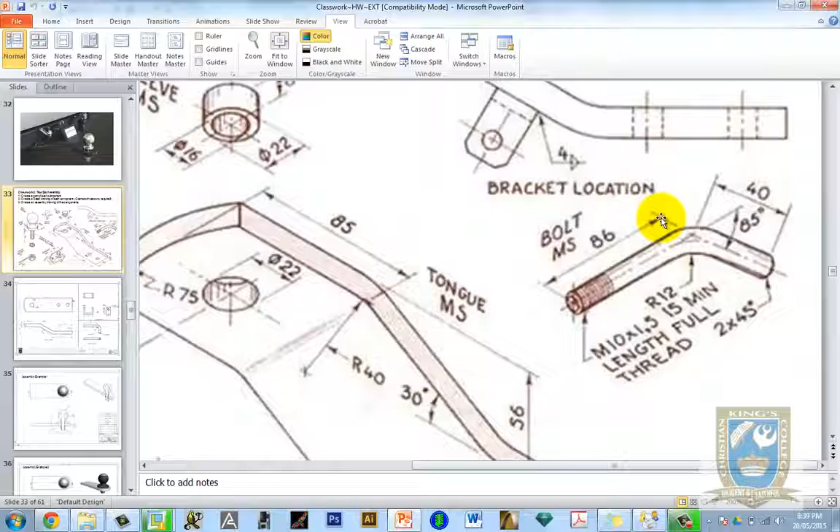The other thing to realize is that we can see that there's an axis line running down the length, and if it was to finish on a sharp corner here, it would be 86 millimeters long. Then from where that axis line meets here, if we were to measure that in a straight line, it would then also come in here at a distance of 40.

We can see that there's a radius of 12 internally inside here, so that this section, this metric 10 circular section here, it can be blended from this end to follow this line, and then blended to fit another section on the other end. So we're going to use the tool called the swept blend, and we're going to start off by drawing the axis for the two sections to blend in between.

So let's start off with this line of 86, a line at 40, which is drawn at 85 degrees to the horizontal, and then this radius of 12. So let's go to Creo. Let's create a new part like we normally would do. So I'm going to call this one Bolt MS 2015. Oh, not Bolly. Bolt MS 2015.

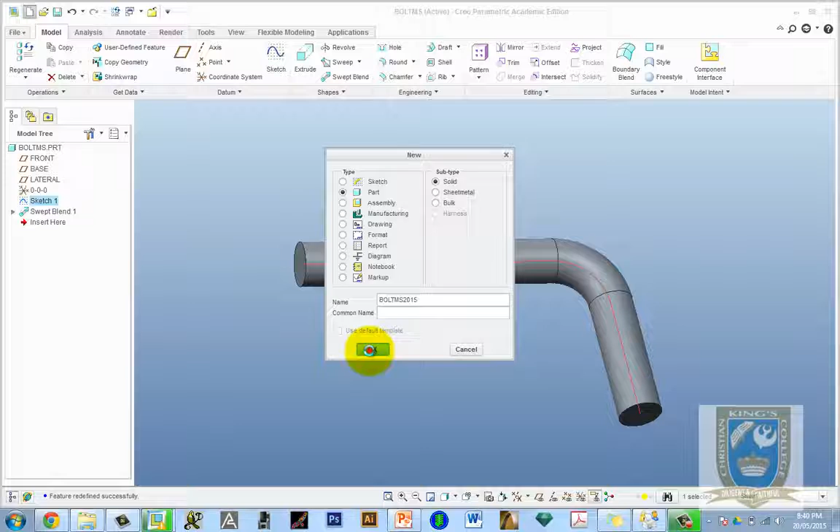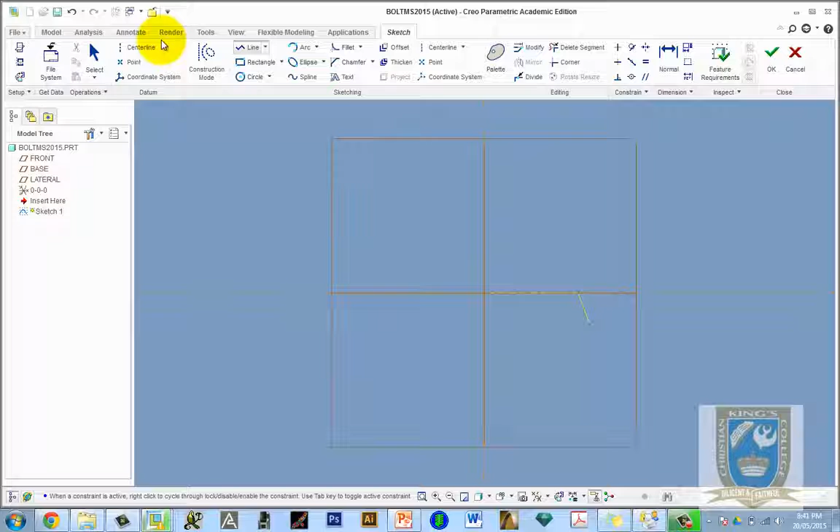And turn our planes on. And I'm going to draw this trajectory on the base work plane. So sketch. And just draw myself two lines which represent roughly the shape that maybe I'm after, and select, and let's make these two lines the length of the axis, so that should be 85, I think,

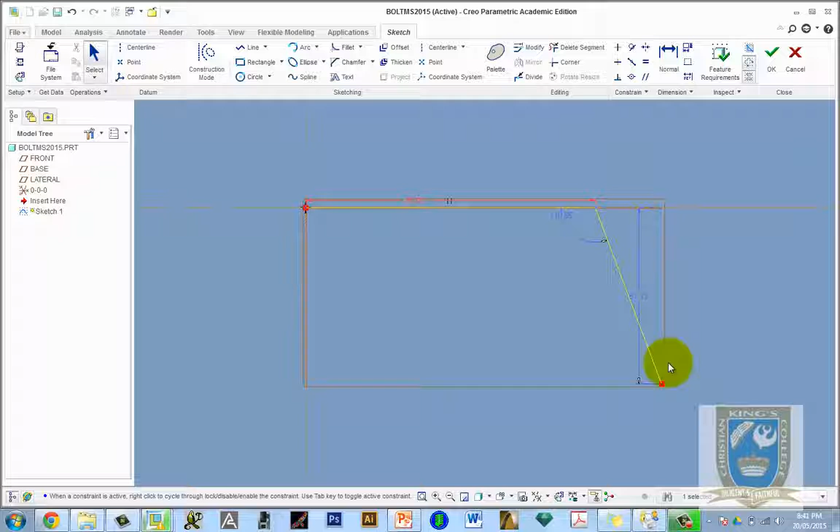and this one. Okay, now when we're not presented with the exact length of a line, so this is a dimension from the horizontal to a point, we may need to do some of our dimensioning ourselves. So click on the dimension tool, select this line, come across, middle mouse click, and we can see we now have a dimension which is parallel to that. So that was 40 millimeters.

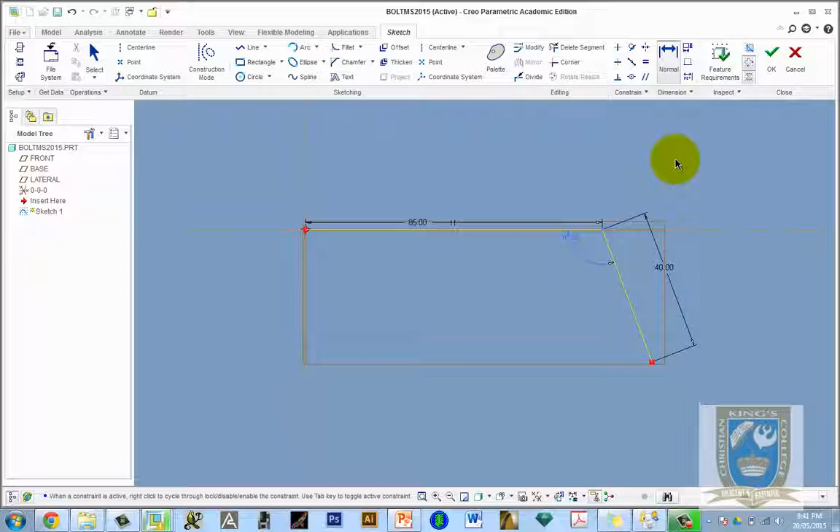And the last thing to do is put the angle between this line and the horizontal line with 85. So dimension tool, once again, click one line, click the line I want to be at angle to, bring your cursor between the two lines as if you were bisecting it, middle mouse button, and change the angle to 85, like so. Okay, so we've got the major 85 in, the 40 and the 85 angle. The next thing to do is to put a fillet in between these two of 12 millimeters.

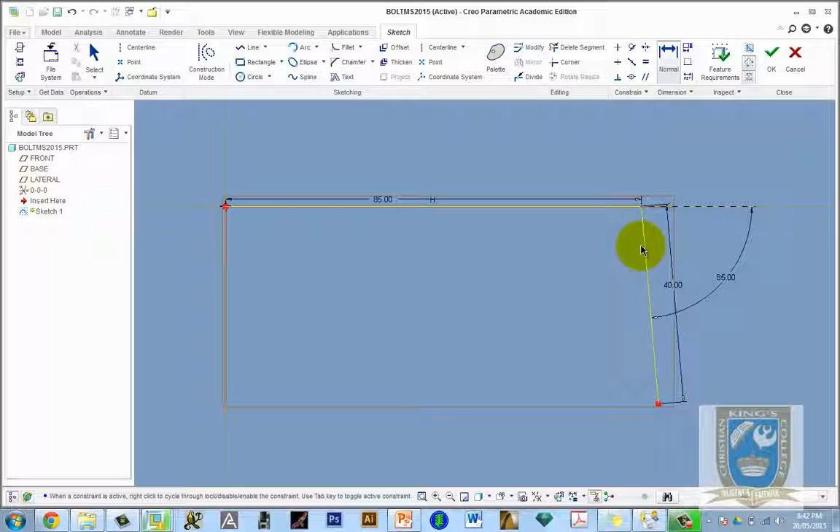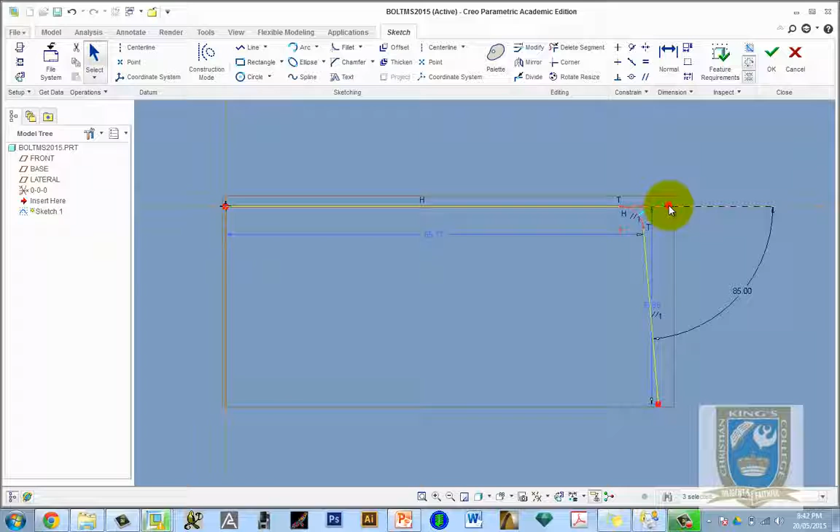So come up to the fillet tool. I might just pull these dimensions away a little bit first so that they're not so confusing. And we're going to fillet between these two lines. So the fillet tool is located just in sketch. Here it is here, fillet. Move your cursor towards the right hand end of this line, select, and move your cursor to the top end of this line, select, and then you can see it just defaults to a standard fillet size. Go to select that dimension and change that to 12, and hit the enter key.

Now what you'll notice here is that the dimensions for this axis have now changed their position. They've locked onto this fillet point, which is not what we're after. So what we might need to do now is just to redimension. So back to dimension, hover over that. You can see we've got some construction dotted lines where the axis was before.

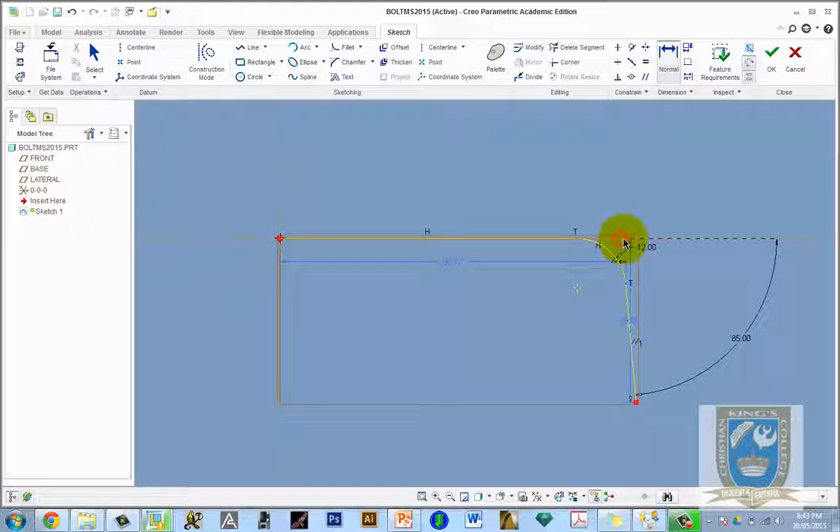Click on one end of that line, wait for the blue to pre-highlight, click there, middle mouse button, and we need to just reconstrain that to be 85 millimeters. And then the same for this one here, the vertical one. So while I'm in dimension, click, and this should be 40 millimeters.

And now that is held securely. So with that done, that is the trajectory actually drawn, and we can change that trajectory at any time that we like. So we're going to now move to the next stage of actually drawing a section on the end of this trajectory, and then sweeping a blend between those two sections.

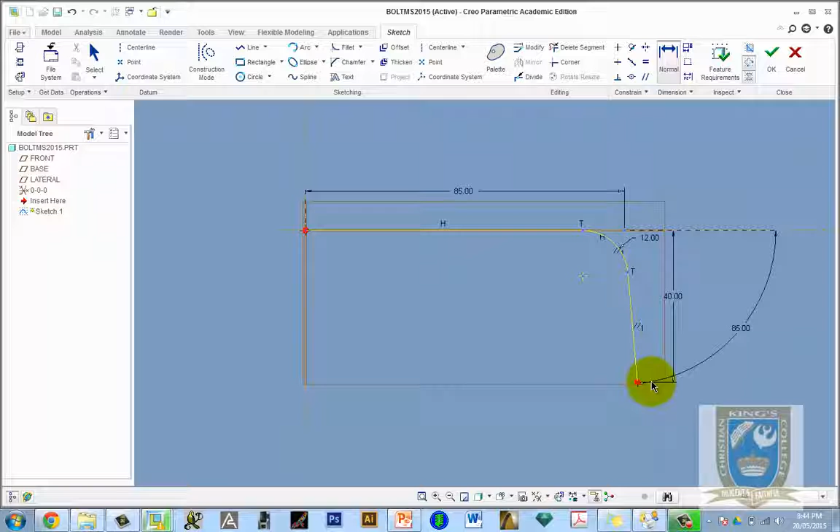We'll come back later on and deal with putting the thread on and also putting the chamfers on the end here. So let's accept that sketch, even though it's not complete, so to speak, and we can see it there in red. And this swept blend is a really handy tool that we're going to use. So click on swept blend,

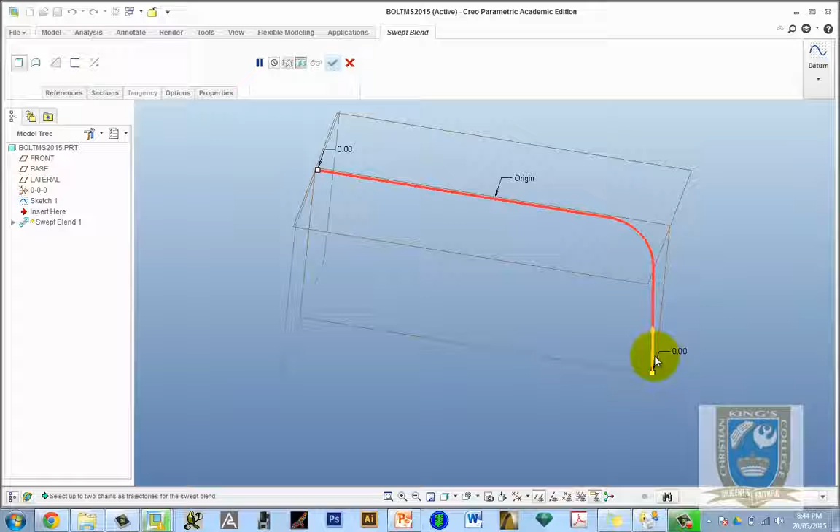and because that was the only sketch that was drawn, the computer defaults to saying, well, that's the trajectory that you're going to sweep these blends along. One end of the trajectory has got this yellow arrow on it, which basically means that's where it's going to start drawing a section. So if we come up to our tabs, we want it to be solid, and come down to this references tab here, and it's already defaulted to that as the trajectory.

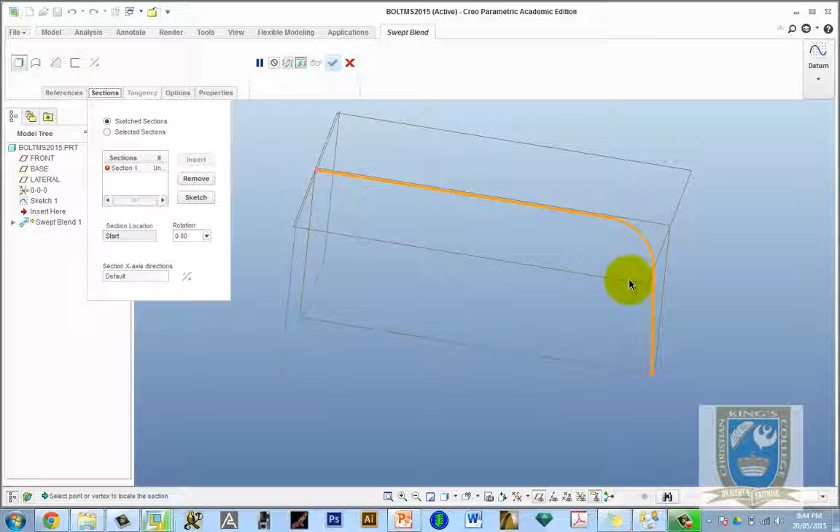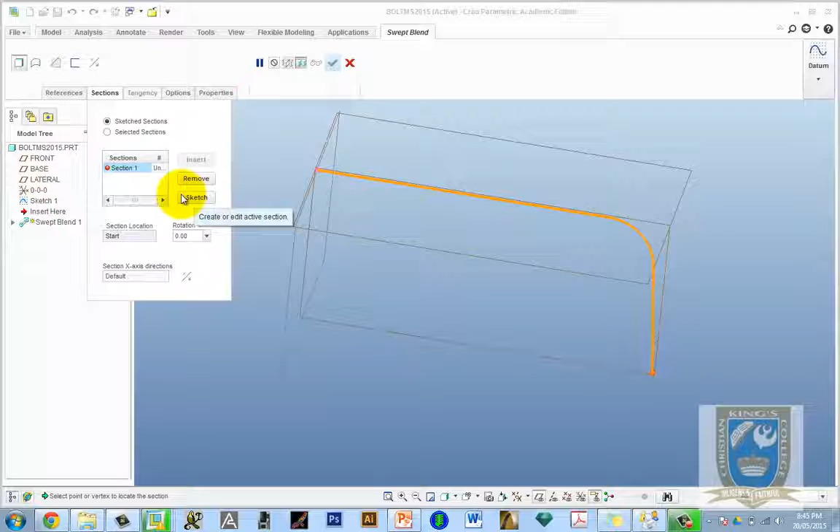The next tab across is the sections. Now sections are the shapes that we draw on the ends of the trajectory to blend between. At the moment, if we look at section 1, there's a box that says unresolved beside it. Also, you have options here that if you have already drawn some sections, you could select them by going select sections, and then come into the model here and select them. But we haven't drawn any sections, so back to sketch sections, and let's sketch a section on the end of this trajectory. So click on the sketch button.

It spins that trajectory around. I'm just going to rotate it slightly here. You can see there's the end of the trajectory line, and it's spun us around so we're looking at 90 degrees to the beginning of that trajectory line. And that's one of the only real requirements, is that when you do a blend, the section or the profile must be at 90 degrees to the start of this trajectory.

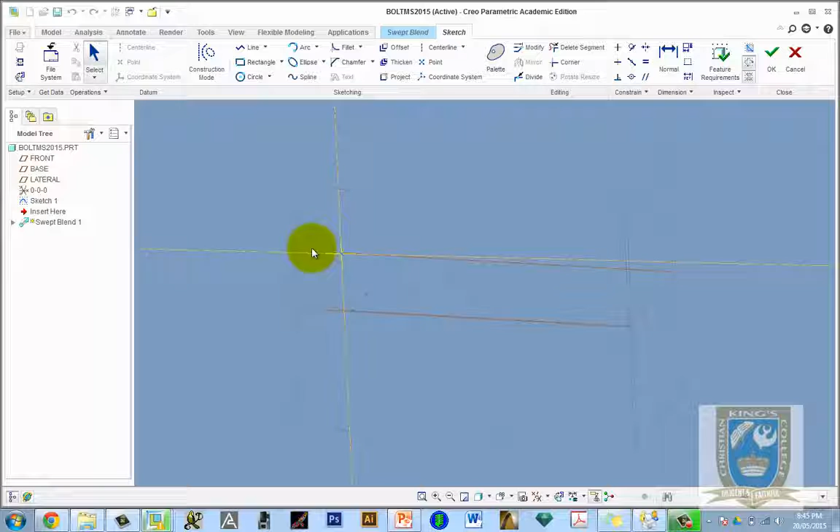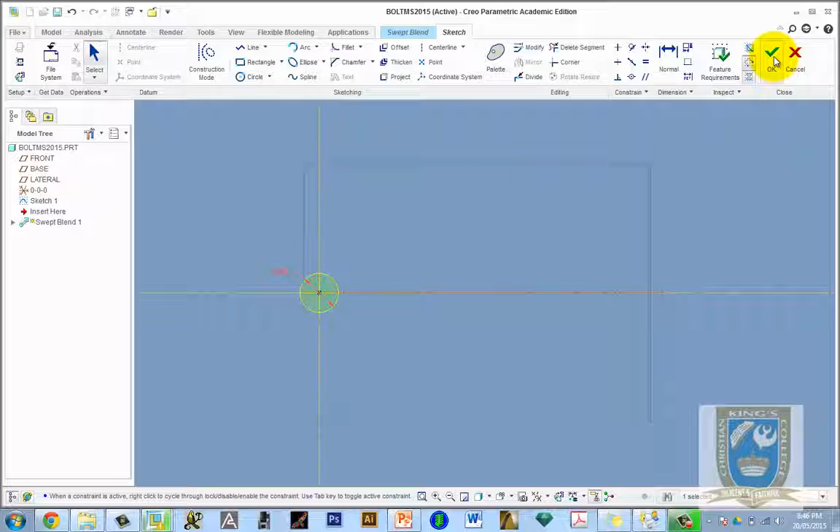So I'm going to turn it back to 90 degrees by clicking on my sketch view button there, and I'm going to draw myself a circle on the end of that trajectory equal to 10 millimeters, knowing that it's a metric 10 thread. 10 and enter. I'm happy with that. I've done one section, so I can accept that by clicking on the green tick. I've done one section, but one section is not enough. I need another section on the other end of the trajectory.

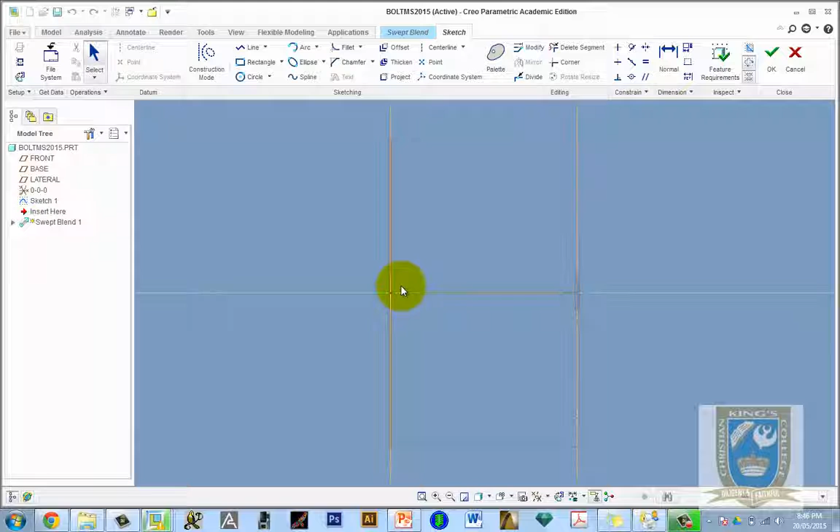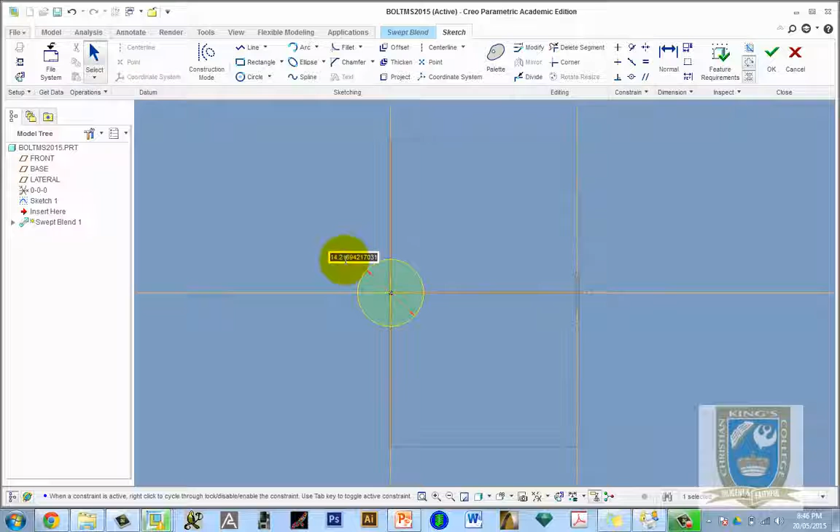So now I click on the insert button over here. You can see section 2, it's undefined, so I'm going to click sketch. It spins it around once again, and if you spin it around a bit more, you can see now I'm looking at 90 degrees to the other end of the trajectory. There's the first section. Now I'm going to draw the second one. Back to 90 degrees, click on the circle, click once, click twice, select, like we would normally do, 10 millimeters, and enter. And we're happy with its position and its size.

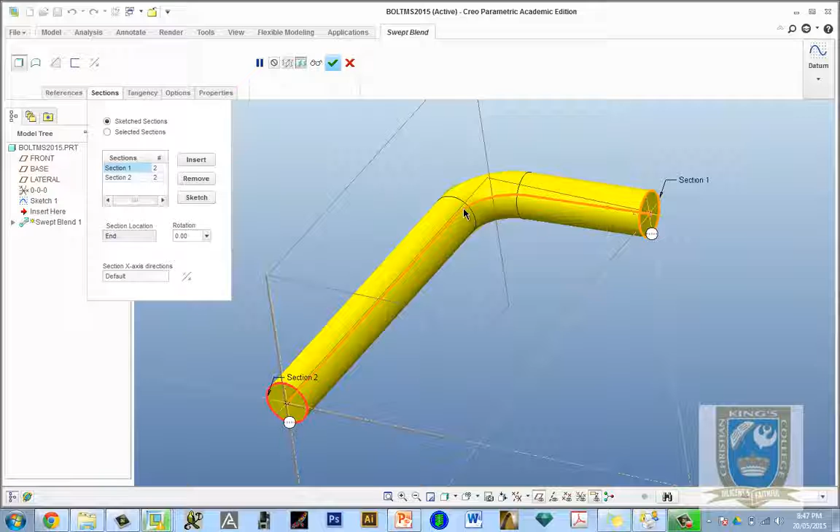We click OK. Now if we just move ourselves slightly sideways, we can see what's happened. That section has followed this trajectory and it's blended with that section. Of course you can make these sections different sizes if you wish to, but that's not what we're after for our actual drawing. So I'm happy with that swept blend. So I click on our green tick, and we're ready to start the next part of the drawing.

Now this is where it gets a little bit tricky. If we go back to our PowerPoint, we can see that the end of the bolt here has a thread.

It's an M10 by 1.5 metric thread, and it's 15 millimeters long, which means from there to where it finishes is 15 millimeters. Now because we've created this part using the swept blend, Creo doesn't like putting a cosmetic thread onto that part there. I'll show you what I mean.

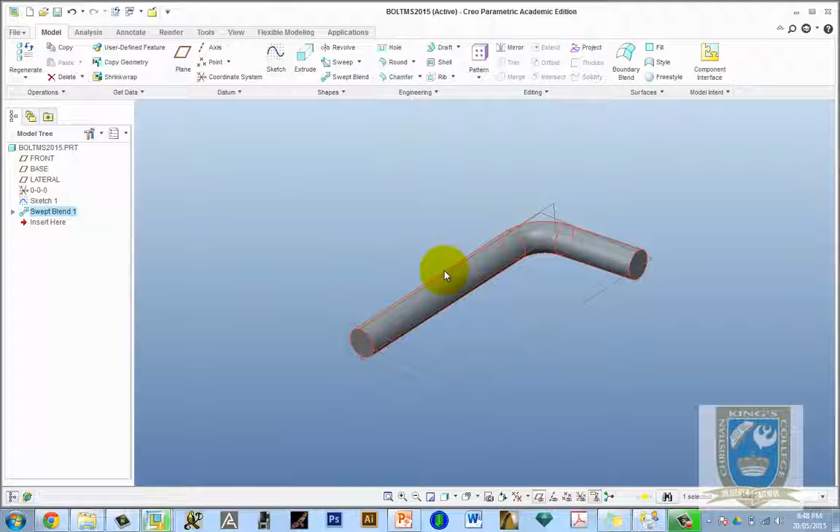If I go back to Creo, and if I was to select this surface like I would normally do to put a cosmetic thread on, come up to Engineering tab, click on Cosmetic Thread, and unfortunately, even though I click on the Placement tab here and select a surface to put the thread onto, it won't allow me. It's got something to do with the way that algorithms are created and the maths basically when a swept blend is created. So unfortunately we're going to have to modify this.

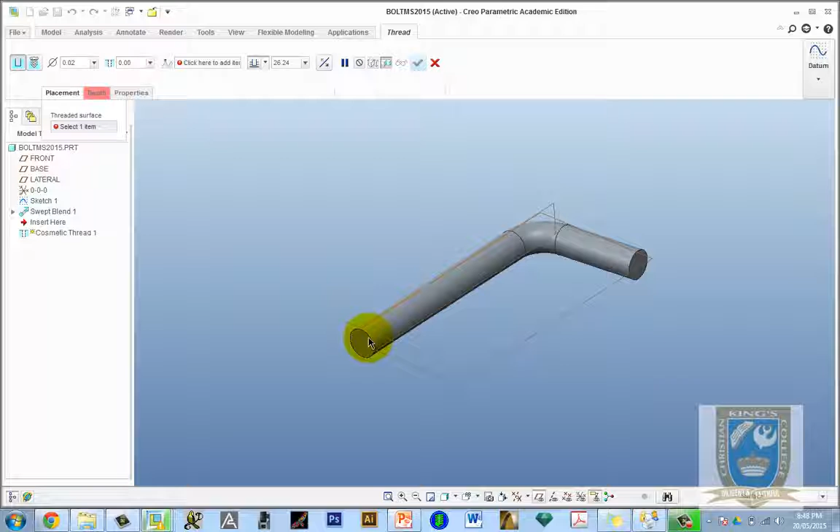We're going to take 15mm off the swept blend, and then we're going to add it back on with a simple extrude, which we can then apply our cosmetic thread to. So I'm getting out of it just for starters. So how do we make this thing 15mm shorter? It's pretty simple. The section from there to there was defined by the length of the trajectory.

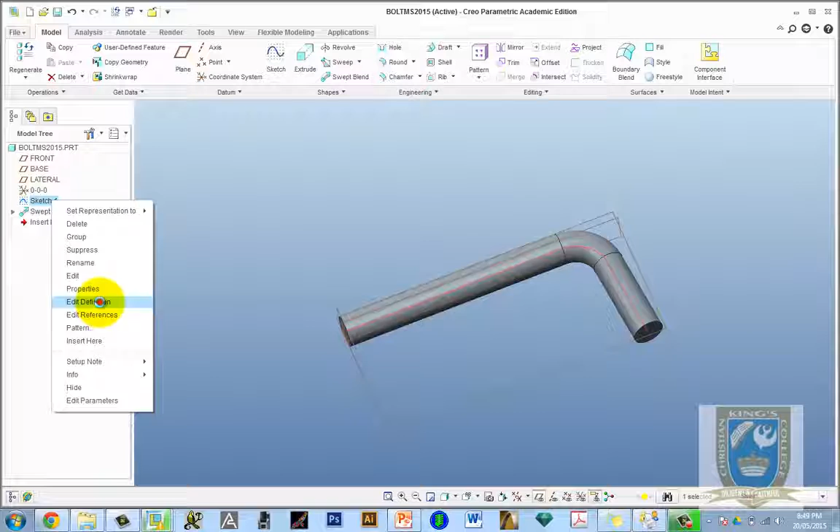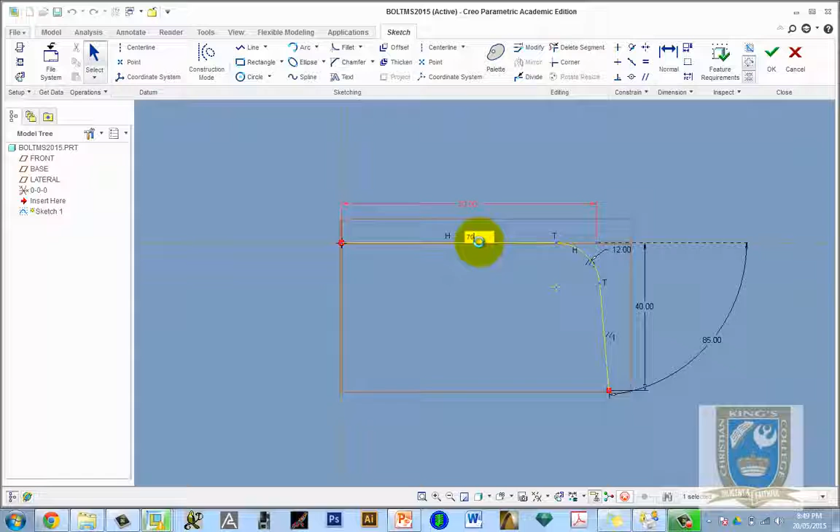So if we just go back to the sketch that we drew the trajectory on, edit definition, and 85 will be reduced down to 70 because it's 85 minus 15, because it was 15mm for full thread, and then we're going to add that back on with an extrude tool. So I'm just going to reduce that from 85 down to 70. You'll notice that everything else is still correctly positioned. Click OK, and all we've done is just shorten that by 15mm.

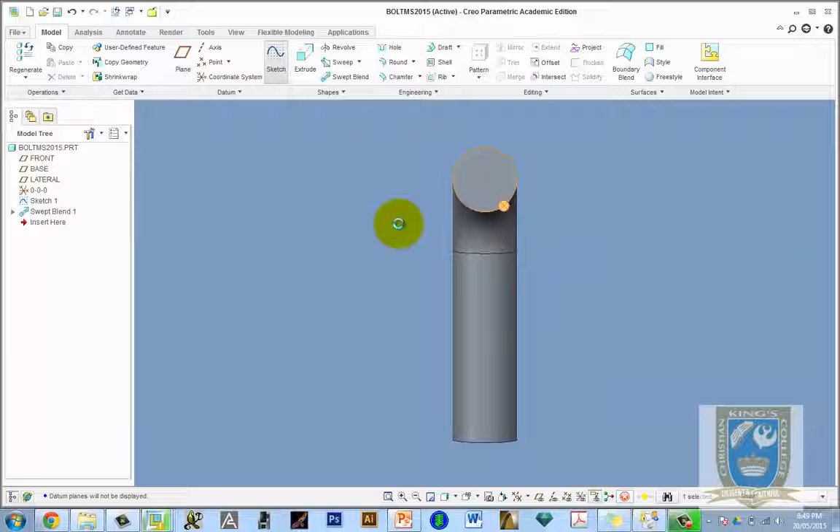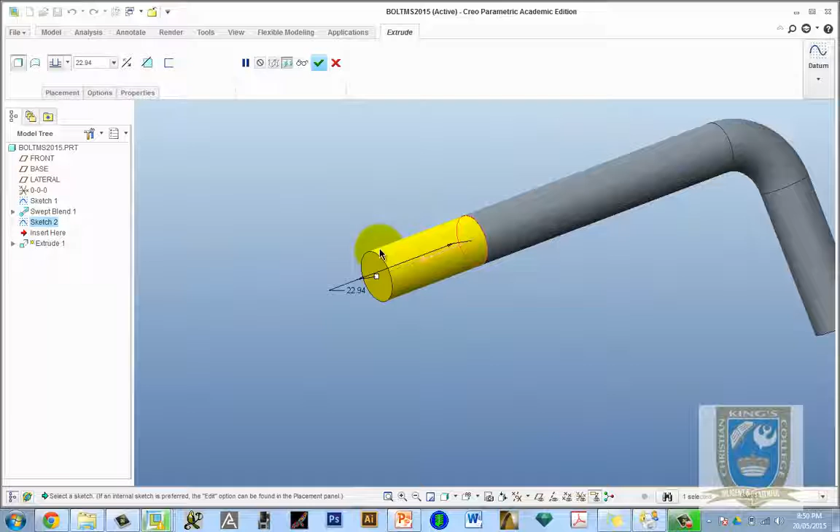I'll turn my planes off so I can see a few things. Okay, that's looking good. So all I need to do now is really just to select this surface on the end. I'm going to put a sketch on there, use my reference tool, get that outside edge, click close, draw a circle on there equal to the other section already, accept that, and then of course extrude this to a distance of 15mm, and we're adding that on in that direction. Happy days.

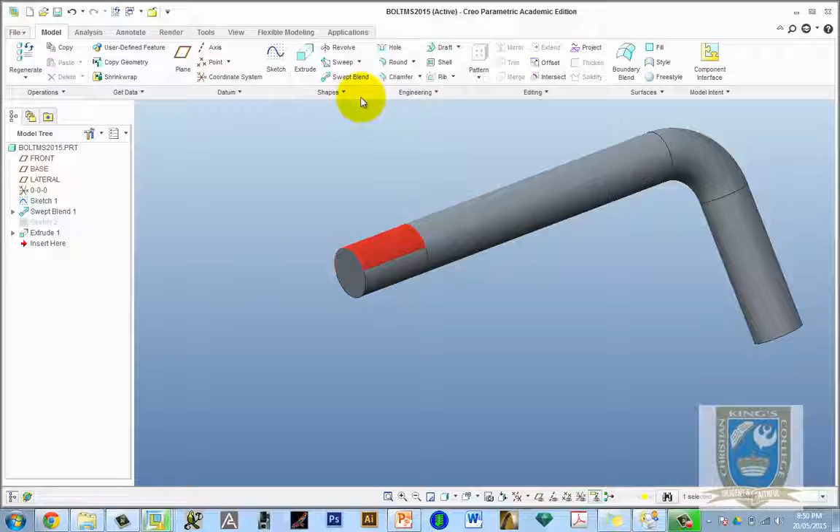Okay, so now we can apply our cosmetic thread to this surface because this is no longer part of the swept blend. You can see the two are highlighting, and also in the model tree there's the swept blend and there's the extrude. So I'm going to select that outside surface, come up to engineering, scroll down to cosmetic thread, and then you can come over here to your different controls for your cosmetic thread. Define a simple thread, define a standard thread.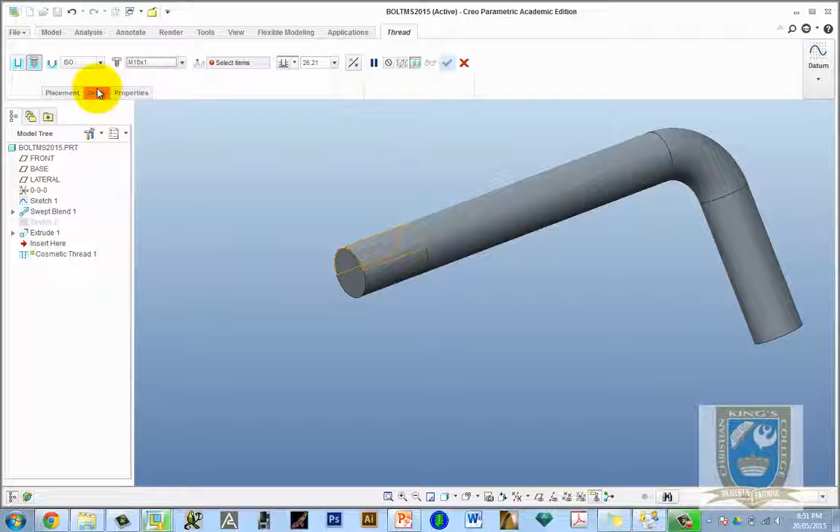So I'm going to click on define a standard thread, and then I'm going to say it's an ISO metric thread, and it's an M10 by 1 mil, I think it said from memory. There it is there, an M10 by 1. And the last thing to do, you can see here it's asking me for a depth. So it's asking me where do I want to start the thread and finish the thread. So I click on the depth tab there, start thread from.

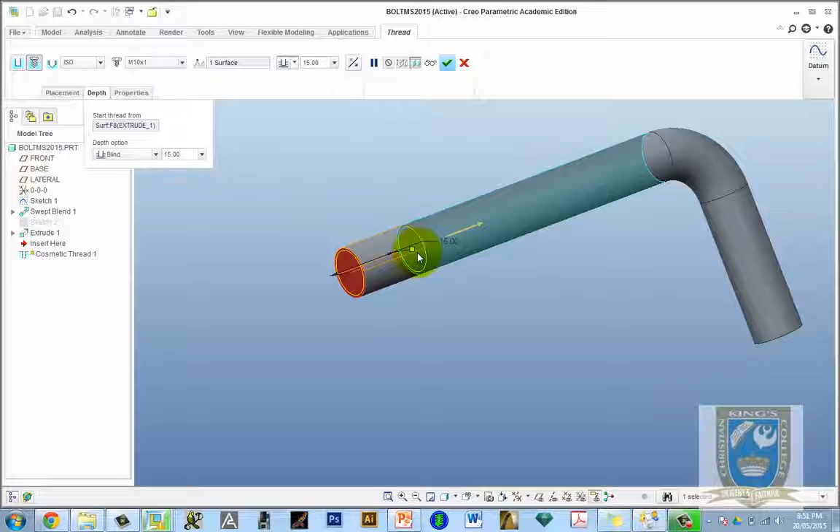So if I select that box, come down here, start the thread there, and you can see that it's defaulted straight away to 15mm in that direction. Obviously you can change its length if you wish to, but we're going to make that 15mm. And we're going to select OK. So now we have a cosmetic thread on the end of that, and the last thing to do is to put a chamfer on the other end. I think that was a 2mm chamfer at 45 degrees.

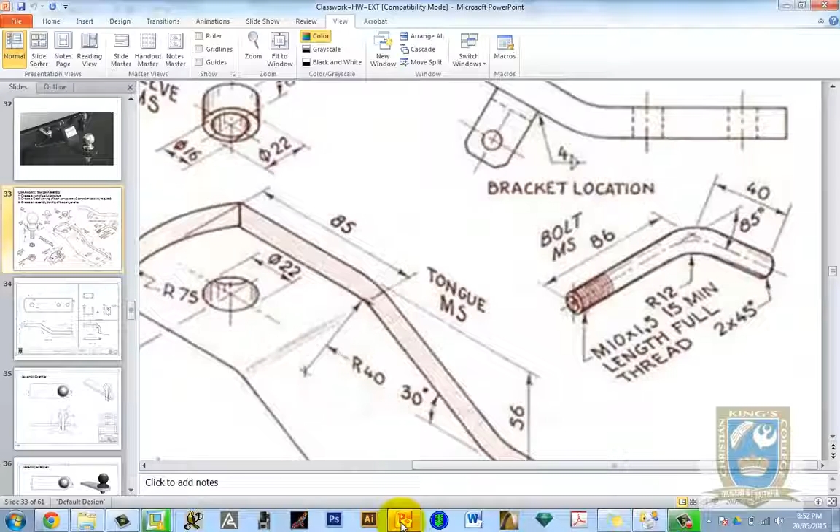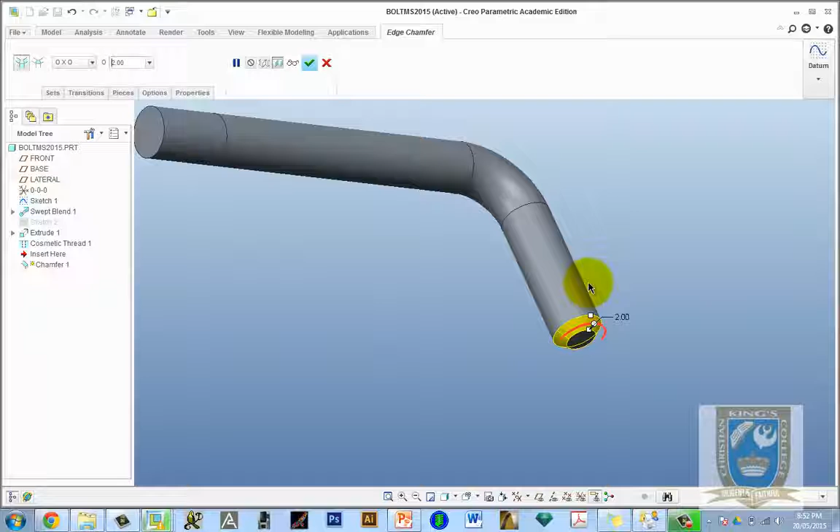So let's go back, let's select that outside edge, click on the chamfer tool up here in the engineering tabs, change it to, that should work, O by O, but the distance is going to be 2. Oops, clicked off edge chamfer, there we go, 2, and enter. You can see now it's put a 2 by 2 chamfer at 45, click OK, and there we have our MS bolt all complete. Okay, see how you go with that one.